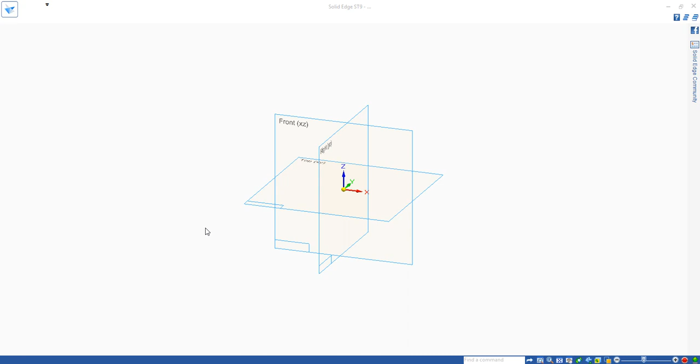then we use the GB metric part. We do the cylinder part, the top part of the hook first.

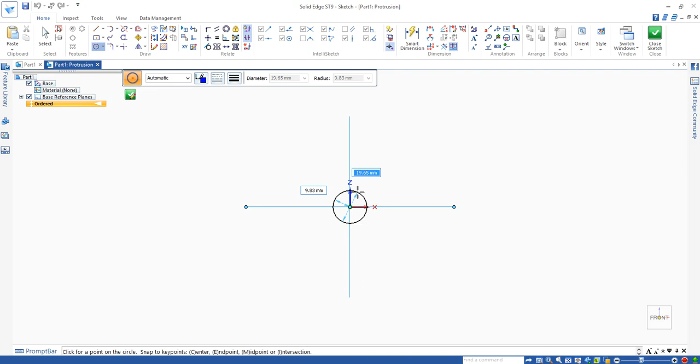Use the Extrude command. Select the plane, click. We use circle by center point to draw a small circle to make a cylinder. Move your mouse to the center and the midpoint appears. Click. The diameter of that one is 20.

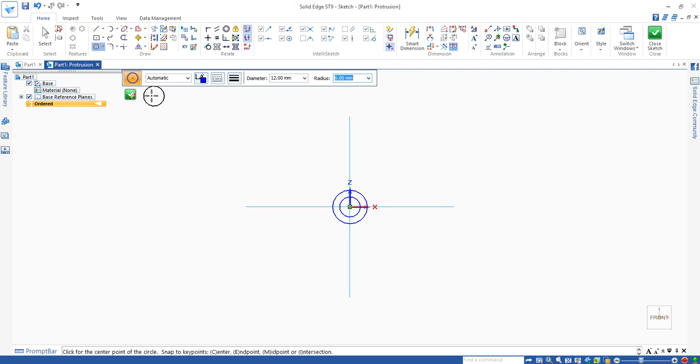There's a hole on the cylinder which is 12 millimeter diameter and 6 millimeter radius, so type 6 in the radius box. Then move your mouse to the center, midpoint appears, click to place the second circle, and click on the green tick.

Then you can see the window goes back to 3D. Make sure this symmetric option appears, then you can do the symmetric protrusion. The distance is 20, type 20 in the distance box, press return, then click finish.

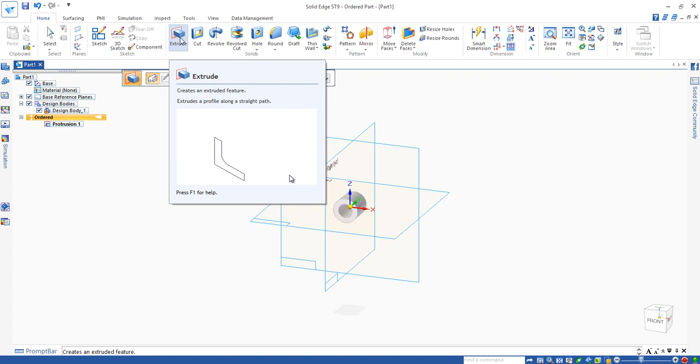We carry on using extrude to make the rectangle shape here. We use the line command, get to this point, and drag down by 25, entering 25 in the box, then click and move until it shows 20. Click, then move up.

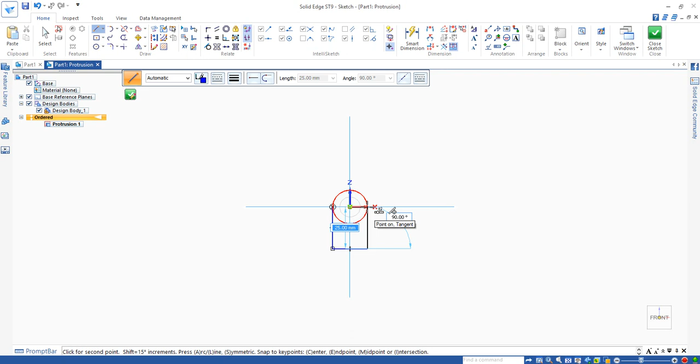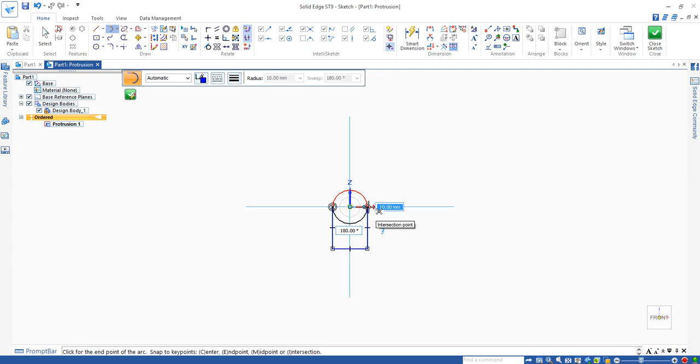When it reaches the point and tangent, both indicators appear, and click. Right click to cancel the straight line command, then select the tangent arc tool. Use this command to draw an arc from the end of the first line, dragging slowly to the end of the third line. Wait until the endpoint indicator appears, then click.

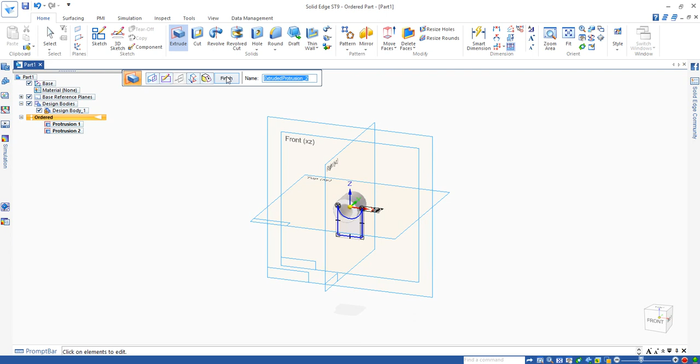Okay, now we can click close sketch. The thickness of that part is 10. Just enter 10 into the distance box, press return, and click finish. We have that part made.

Next we're going to make the hook body. We use this command called sweep, with a single path and cross section to make the body of the hook.

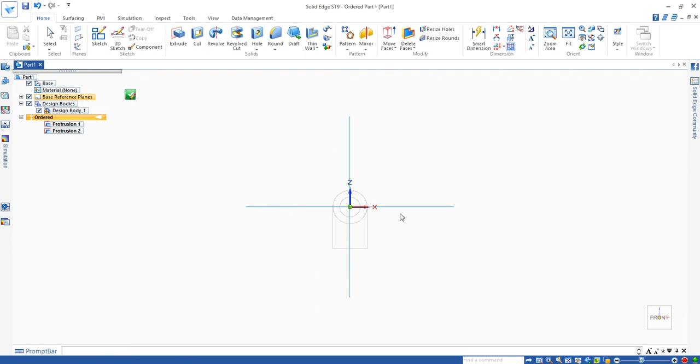Click the bullet point for single pass and move back to the window and click on the front plane. Now we need to move this a bit higher. Press Shift, Control plus right mouse key to move it higher.

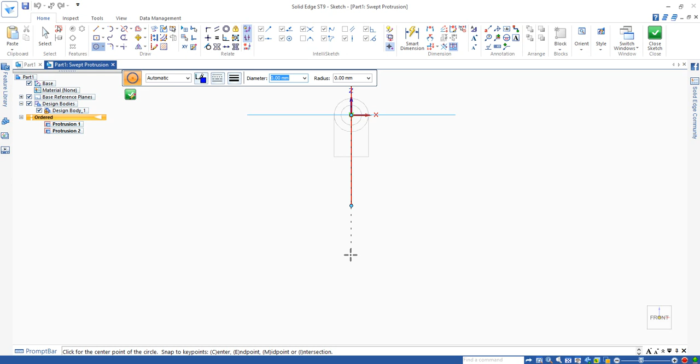Then we use circle by center point. Click the command, move the mouse back to the window. Highlight this vertical line and drag until the dotted line appears, meaning the mouse is aligned with the vertical line, then click and drag.

The diameter of this one is 90. It's the outer diameter of the hook, so the radius is 45, meaning the diameter is 90. Press enter.

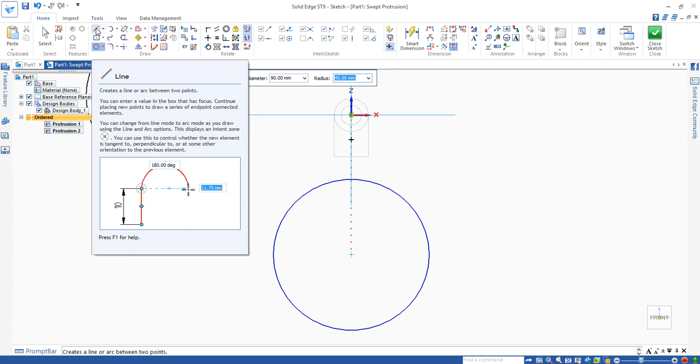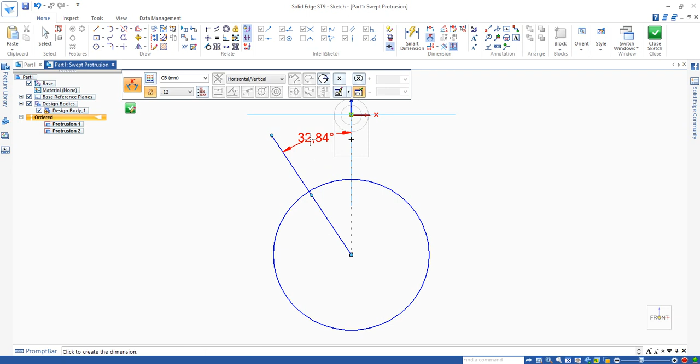Then we use the angle dimension between that line and that line. Click and the dimension box appears. Just double check using smart dimension whether the circle is still 90. Okay, 90, fine, good.

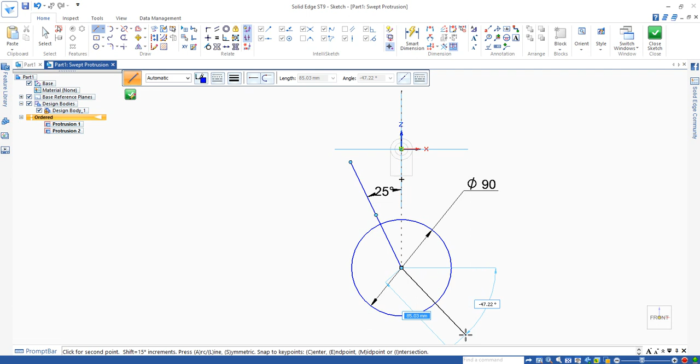Right click to cancel the command. When you need to draw another line, click the line tool and move to the end of the first line, then drag it away. Click, then right click to cancel the command.

This time we use the angle between the vertical line and that one. This figure should be 135 in order to get the 45-degree angle between this and this, as you can see from the drawing.

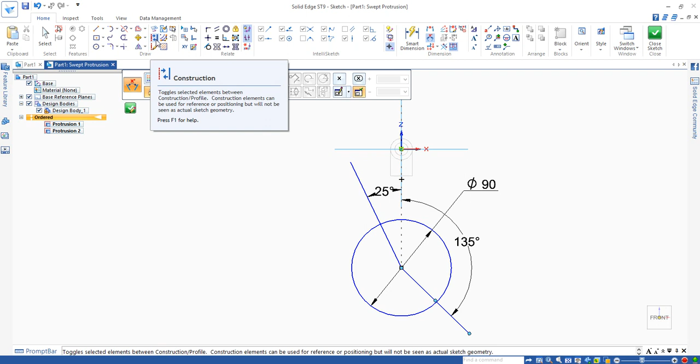Once you've done this, we need to use the trim command to remove that line, since it's the line we don't need. Then we use the construction command to turn this line, and this line, into construction lines.

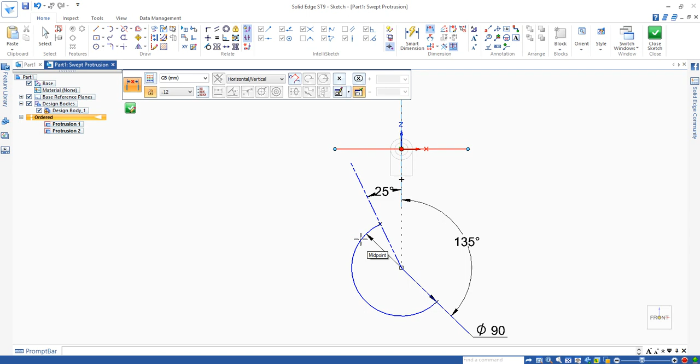Okay, next is to finish the path. Before we finish the path, we need to set the distance between the center of this path and the horizontal line as 74, as shown in the drawing.

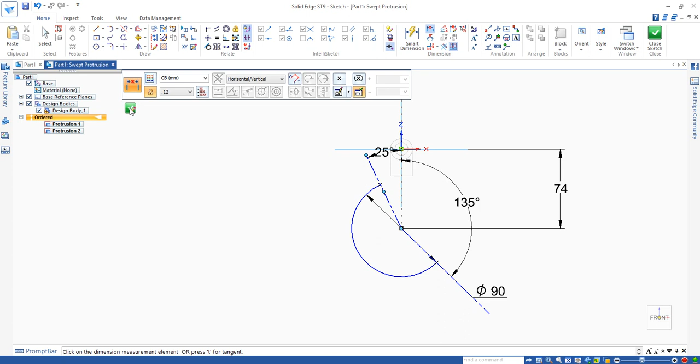Right, okay. Now we can go to the next step, which is to draw a cross section, and let the cross section sweep through the path to make the 3D body. Click on the green tick.

Here, if we click finish, the system will automatically move to the next step, the cross section step. In this step, we need to draw a profile here.

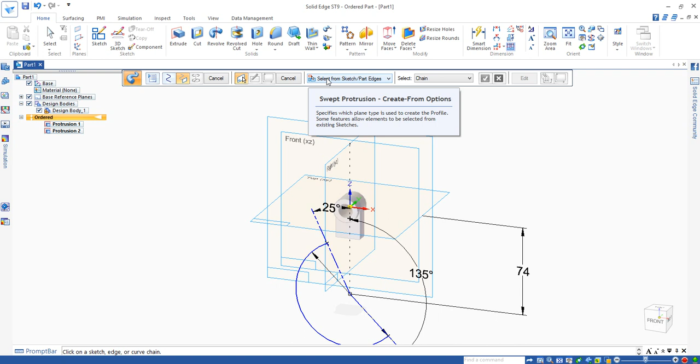So we need to use the plane normal to curve command and click on this one so we can see the plane which is normal to the curve. We drag this to the end of this side of the curve, and then this plane appears.

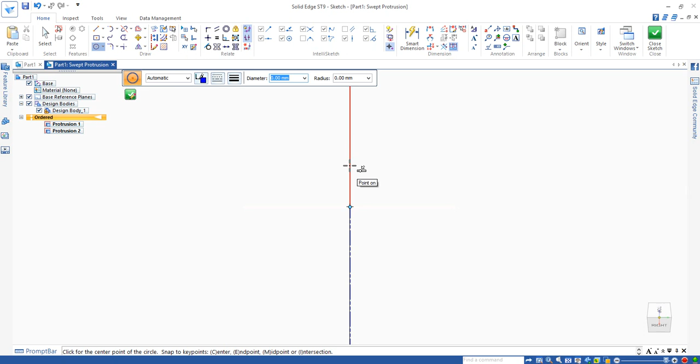On this plane, we need to draw the X shape as shown on the drawing. We do that first through two circles, one is 14 millimeter diameter, the other is 10. But these circles have to be on this line, so when the point on appears, just click, drag, and enter 14.

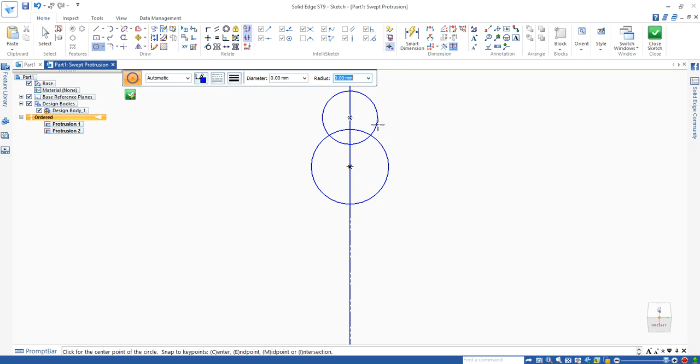This is the first one, and the second one is 10. So the radius is 5. Just enter 5 in the radius box and press enter. Make sure this point on appears and click. So I got the second one. Right click to cancel the circle.

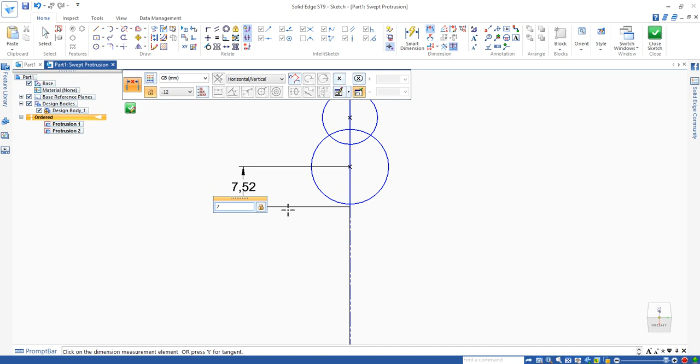Now we need to set the distance between the center of this circle and the end of the path. When this indicator appears, that distance has to be 7, so it can touch the end of the path.

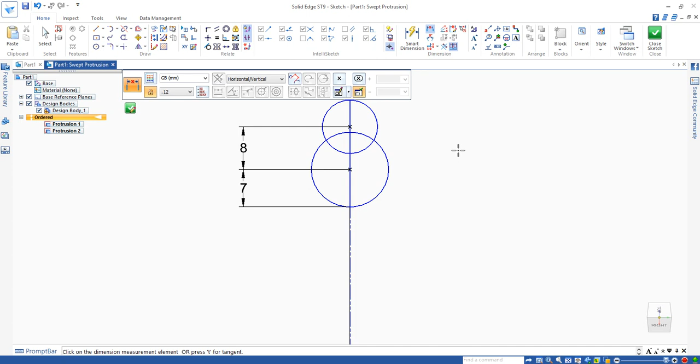Then we need to set the distance between that point and the large circle, click that point and click again. You'll see the box. The distance between these two is 8, as you can see from the drawing.

Now we need to actually make a closed X shape using the straight line command. Point on and drag, and when it reaches the large circle, the point on and tangent indicators appear at the same time, and you click down. So that one is done.

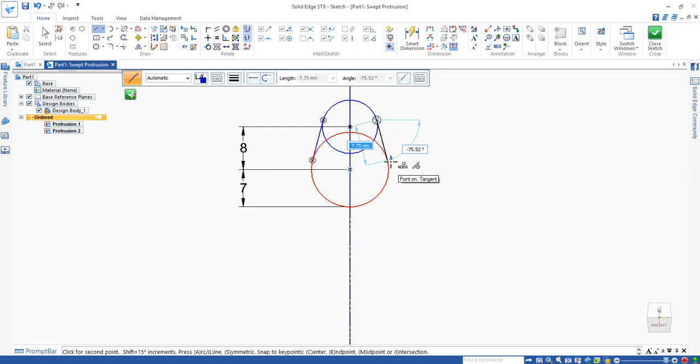Right click to cancel the command, and use the line command again. Point on, drag it down, wait for the indicator to appear, click, then right click to cancel the command.

Now we need to use trim to remove these lines. The loop is done. Now we can actually close the sketch.

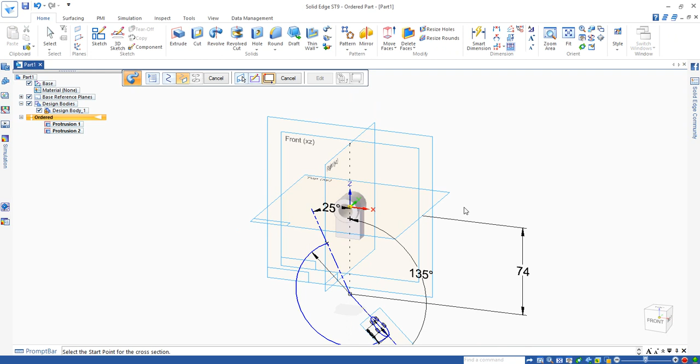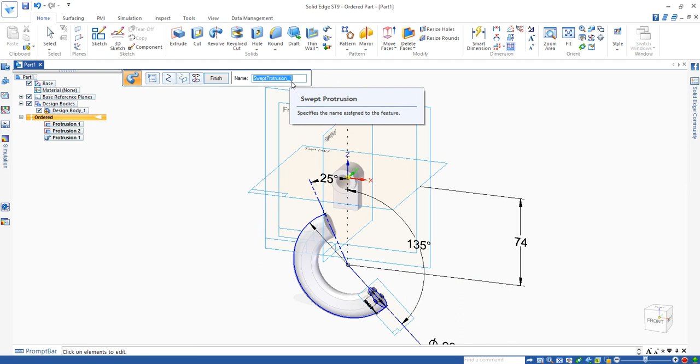You can see we have a path here, and we have a cross section here. In order to tell the computer which cross section, we need to actually click on the cross section, then click on finish. You'll see that profile extrude through this path. If we click on finish now, all the dimension lines disappear.

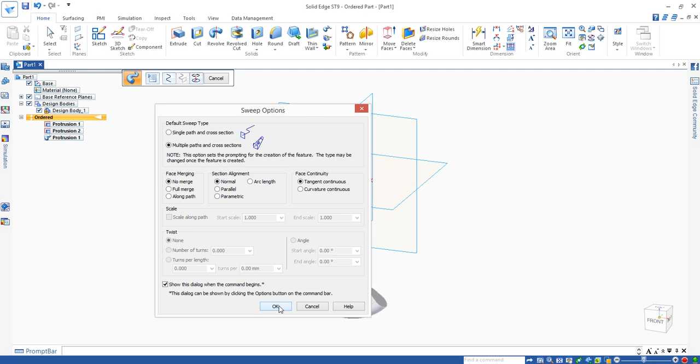We have this model. The next step is to draw that part. We use this sweep protrusion again, but this time it's a multiple path because we have multiple paths and cross sections, since we have different cross sections. One is a rectangle shape, the other one is the egg shape.

So here we need to actually draw the paths first. So coincident plane, and select this. Then use the arc, tangent arc command, starting from the middle.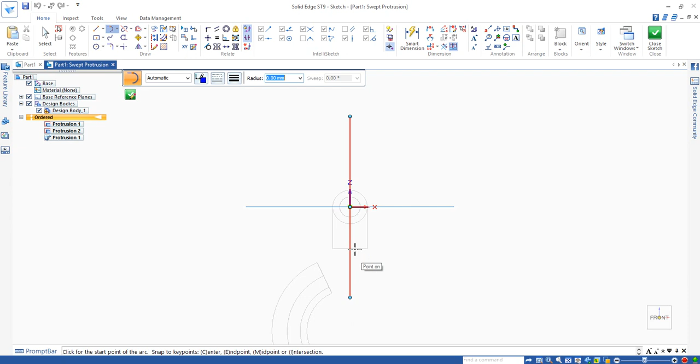And drag it down to that position. Right click. So that's the path. Click, close sketch.

If we click on finish now, it allows us to draw another path or move to the next step, because it's multiple paths. When you finish the first one, you can draw the second one and third one and so forth, until you click next, which moves you to the step asking you to draw or select the cross section.

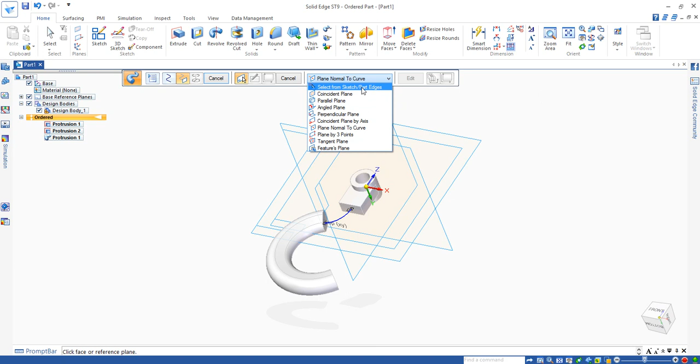Since we already have these two cross sections, we can use this drop down menu and click select from sketch and part edges. We select this loop as an edge, so we can select the entire loop of that one.

Make sure you can see one red spot there, and then click and move to the next. If it's not large enough, just make it large enough. Move to the next feature, and you see these red spots. The circle, or the egg shape ellipse, is highlighted, and click.

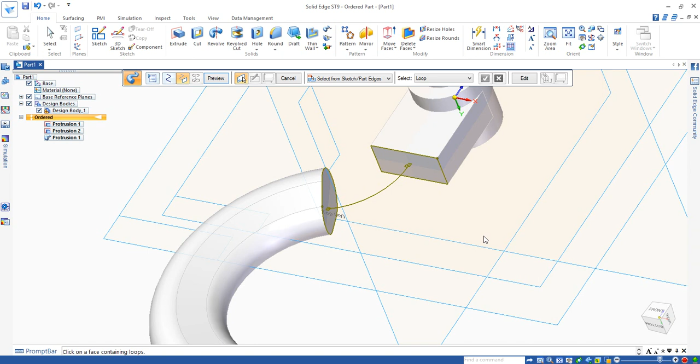So we have one, two cross sections. This is the one we want to actually model, created through this path. Once you select it, click on preview, and you will see the model be created automatically. You can see two profiles from the edge and one path. So this is done. Click on finish.

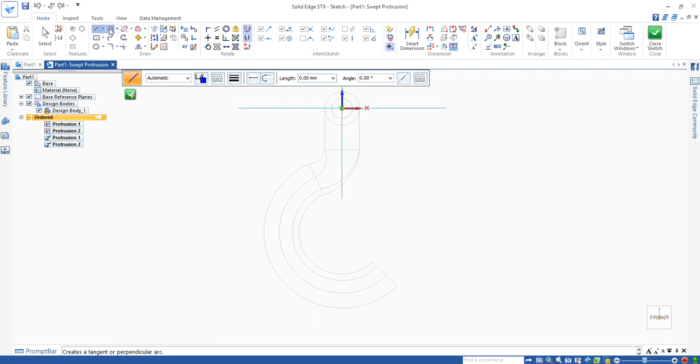The last bit is to create a small tip at the end of this hook. We carry on to use sweep, and a multiple one because we can have two different cross sections as well. We choose this front plane and move it up.

Use tangent arc and drag it. There's no specific requirement for the dimension here; you can just draw an appropriate one yourself. Click, and the path is done. Click, close sketch.

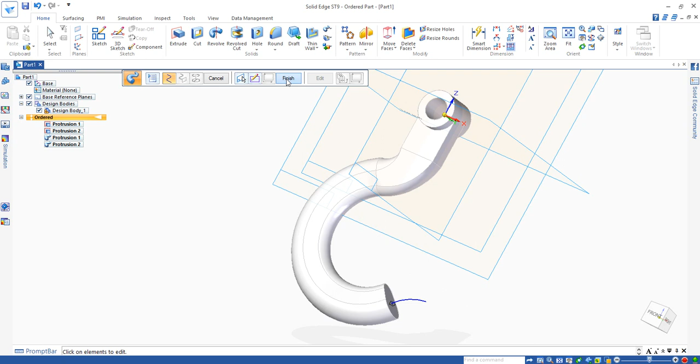You can see the path, and then we finish the path. We move to the next cross section step. In this step, we need to draw another small profile here.

Okay, I do a small circle. I use plane normal to curve, same command. We actually draw this egg shape and drag to the end of this curve and click.

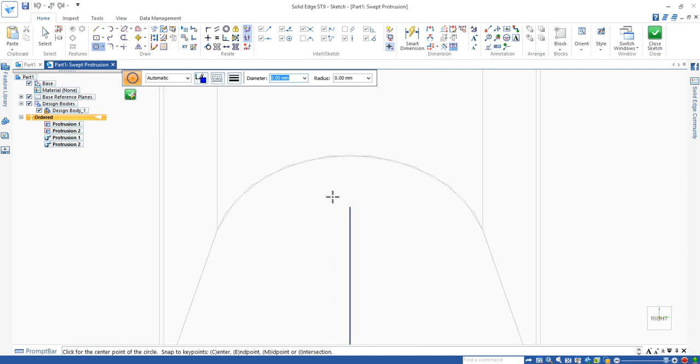You're in the 2D sketch now, which allows you to draw a circle by center point. Click and drag, then enter the dimension. Again, there's no specific requirement for dimension; you can just have your own dimension here. Press enter. Right.

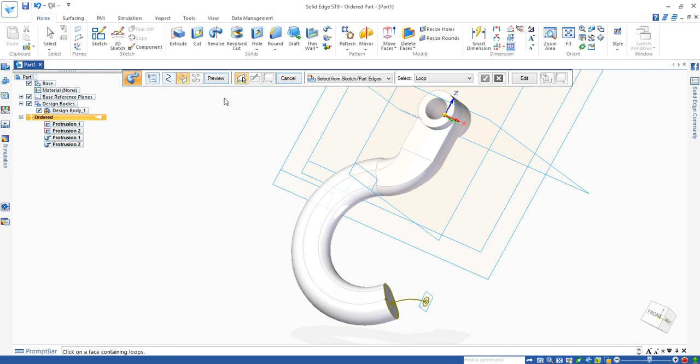If you close the sketch, you'll see we have the paths and the cross section. We need to select this one as the second cross section. So we click on finish this one, and click on the drop down menu, select from, use loop. You can select this one and do preview, and you can see the system automatically create a model between the two profiles through the path.

Click on finish. So then you have your hook done. That's it for this video.